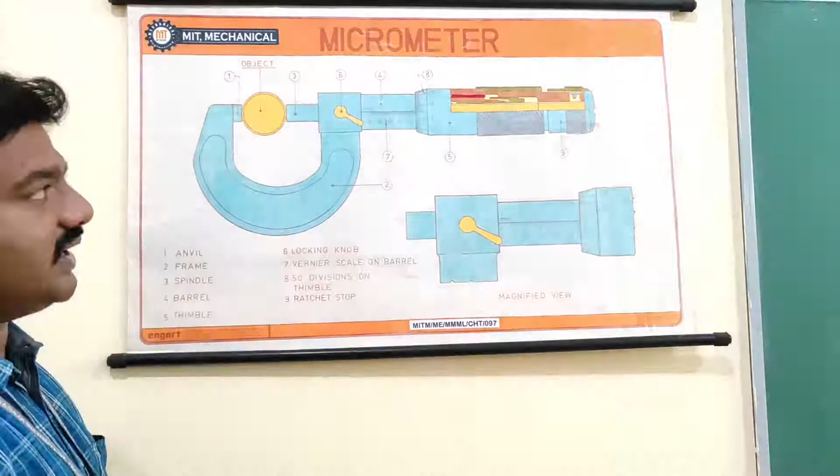So now we shall take up the description on the construction and detailing of micrometer. So this is the constructional detail of a micrometer here. We can see the U-shaped frame which consists of different components and the naming is mentioned here. So this is number 1, that is anvil in the micrometer. Then this U-shaped frame is called the frame or the supporting structure. Next, point number 3 is the spindle.

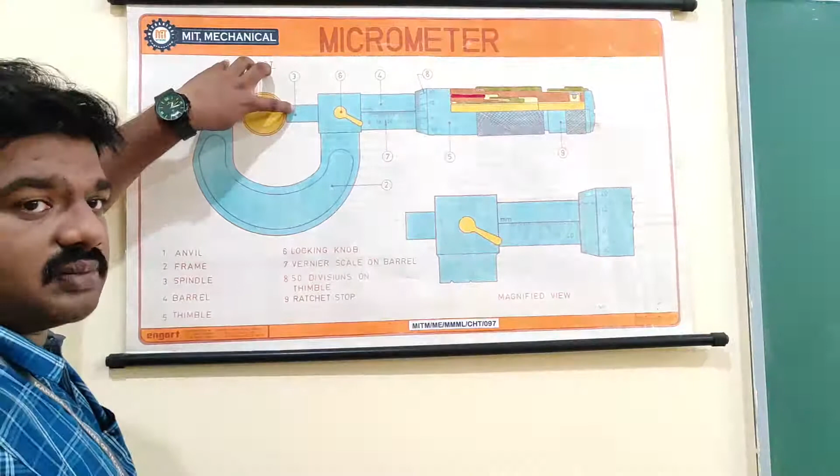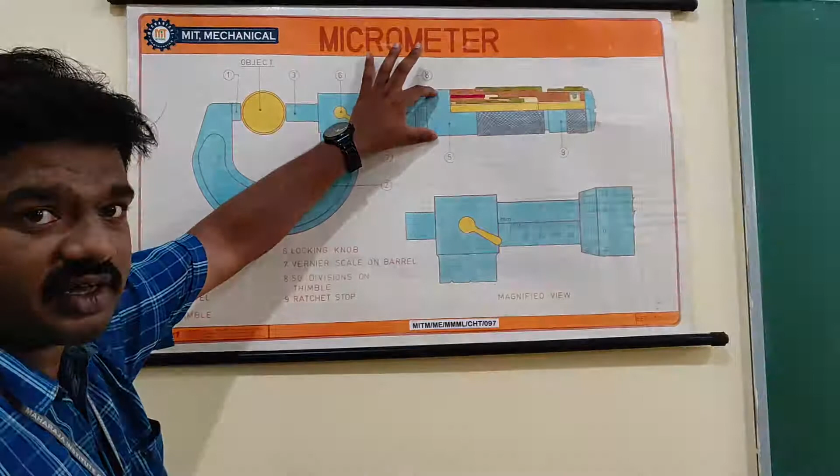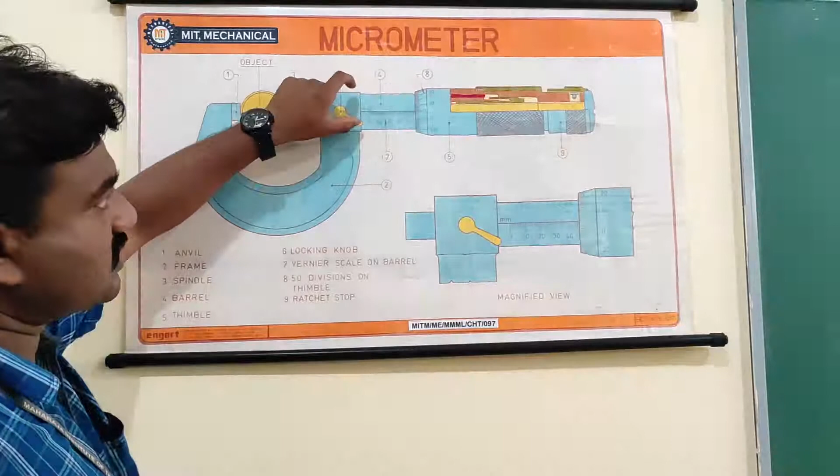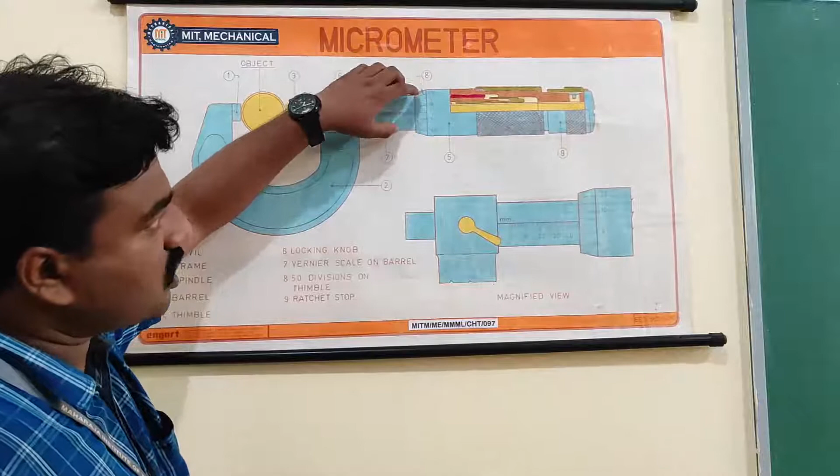Next comes the complete barrel, which is point number 4, followed by the thimble, that is point number 5 here. Next, 6, that is locking knob, followed by 7, the vernier scale on the barrel. So this is the barrel upon which there will be segments which are the scales for the measurement, and that scale is called vernier scale, followed by the number of divisions on the thimble, represented using number 8, and at the end, point number 9, that is the ratchet stop. So this is the constructional detail of a micrometer.

To give another brief instance of micrometer, we have already studied micrometer from the second PUC level or at the first semester of engineering. Now we are going to look at the actual micrometer which is to be considered for the study here.

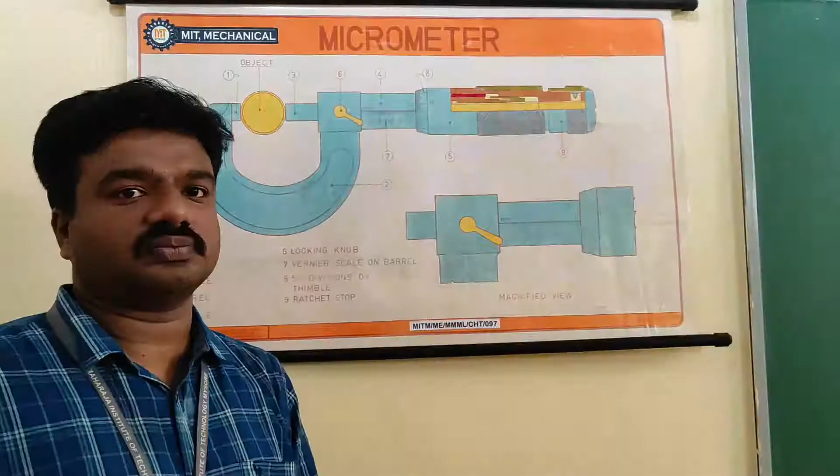This is the micrometer. Here this is the anvil, this is the spindle, this is the frame, this is the barrel which has the readings or scales, and this is the thimble, and this is the ratchet stop, as well as the locking knob. So this is the actual micrometer which is to be calibrated in this particular experiment.

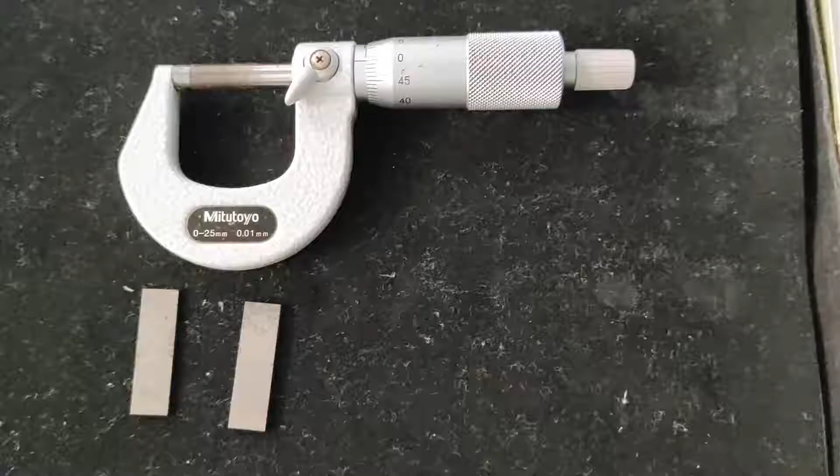To start with the experiment, let us consider this micrometer in the initial condition. In the initial condition, the micrometer should be checked for various aspects before starting its calibration. Point number 1 is that the axis of spindle and the anvil should lie along the same axis, followed by the correction factor. Here the scale reading is considered to be 0. That means the micrometer is ready for calibration.

So in order to calibrate this micrometer, let us take 2 slip gauges, one measuring 1.5 mm thickness, another measuring 1 mm thickness. So totally, these 2 slip gauges account for 2.5 millimeter. So now we are going to calibrate the micrometer such that the thickness of 2.5 millimeter is obtained from the micrometer.

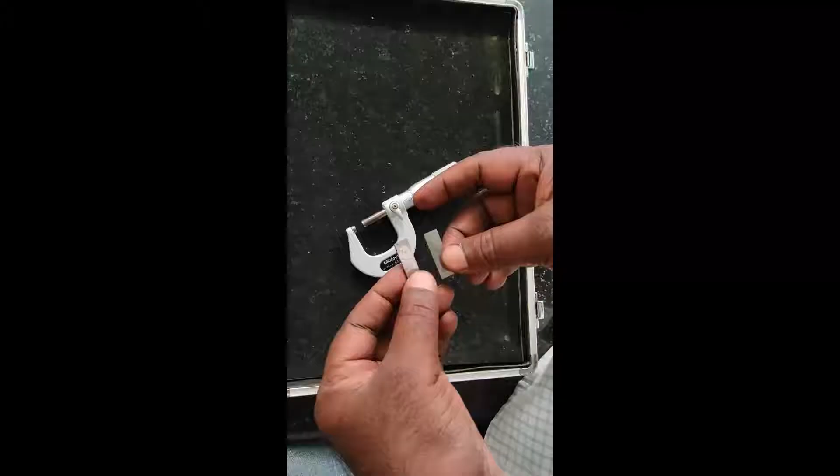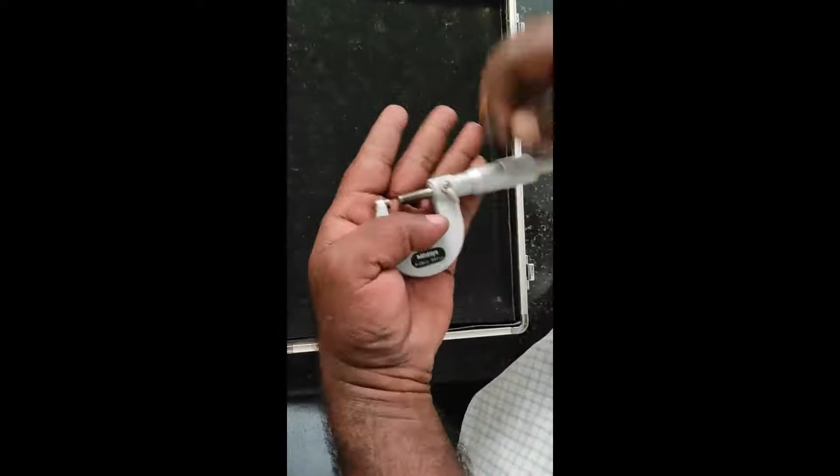Now let us start calibrating the micrometer using the slip gauges accounting for 2.5 millimeter thickness. We have to ensure that these 2 slip gauges are properly positioned within the anvil and the spindle firmly so that it accounts for the measurement of its thickness. So we have to place the slip gauge between the anvil and spindle, and rotate the thimble such that the slip gauges fix firmly between the spindle and anvil.

Once it is fixed, the lock nut is to be considered for locking the entire unit here so that the slip gauges don't go beyond. Now it is time for the measurement of the scale here.

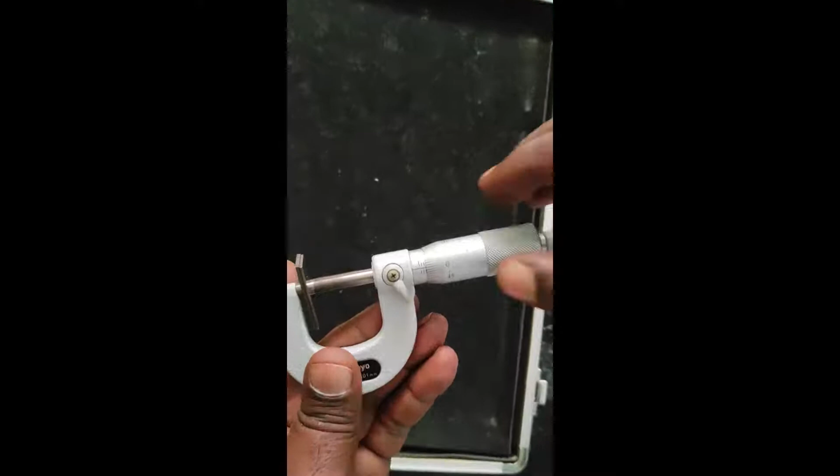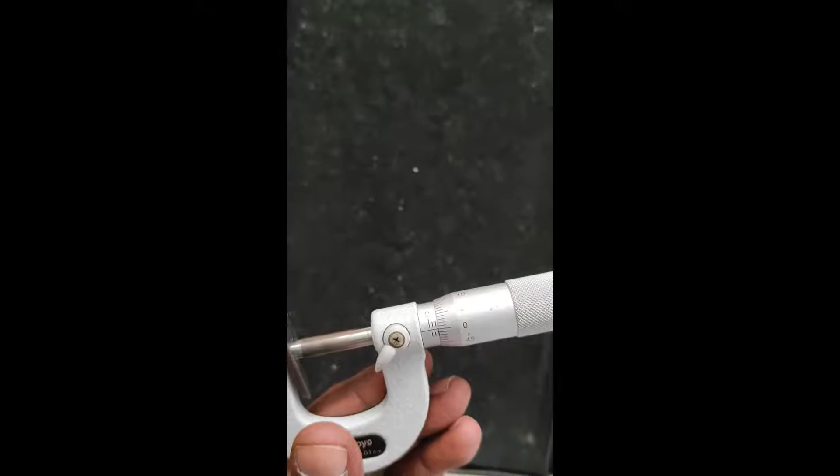So in measurement of scale, we can observe neatly here that 5 divisions are visible in the main scale reading, that is in the barrel. Each division accounts for 0.5 mm. So hence in the barrel it is 5 divisions. And in the thimble, that is the reading available on the thimble, 0 is coinciding with the exact center line. So considering these values, we are now going to calculate the value of the thickness given by the micrometer compared to the value of the slip gauge's thickness, which is taken as reference.

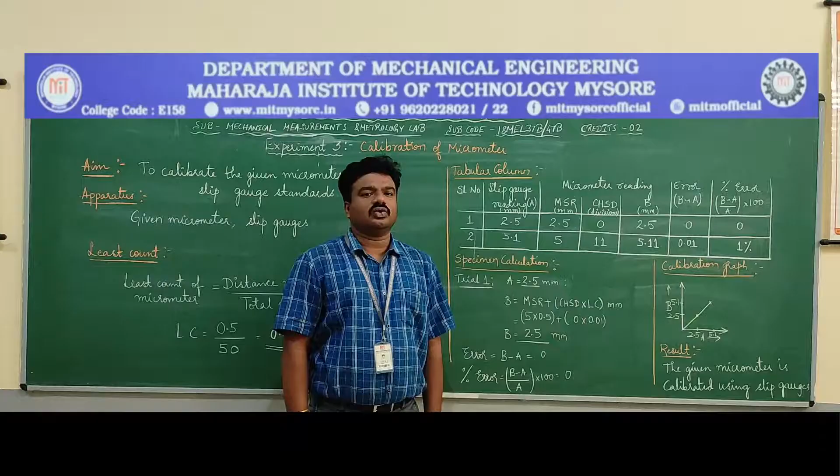Let us go with the calculation part for the calibration of micrometer. So here, this is the tabular column which is to be considered during the calculation. The first one is the slip gauge reading in millimeters, taken as reference A. Next is main scale reading, which is based on the number of divisions identified on the barrel. So here we take MSR in mm by considering the number of divisions identified on the barrel multiplied by 0.5, which gives the value in millimeter.

So in the experiment we had identified 5 divisions. When we convert the 5 divisions into millimeter, we multiply 5 into 0.5, so that we get 2.5 millimeter. Followed by the coinciding head scale division. This is where the division on the thimble coincides with the reading present in the head main scale. So here in the experiment we identified 0 coinciding with the head main scale reading,

hence the value remains 0 here. The calibration of micrometer will be taken with respect to the letter B, and B refers to main scale reading in mm plus coinciding head scale divisions into least count. Least count is defined as the distance moved per rotation of thimble divided by the total number of divisions on the thimble. For the micrometer we have taken, the distance per rotation of thimble is 0.5, and the number of divisions is 50. Hence, the least count of the calibrated micrometer is 0.01 millimeter.